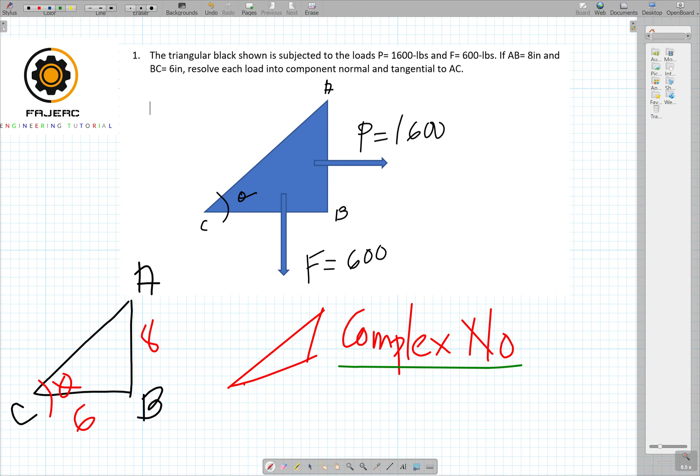Okay? Complex. Now, pinag-usapan na naman natin yung complex. Ano kaya ibig sabihin ng complex number? Ano ibig sabihin ng complex number? Diba? What do you mean by complex number? Ano ibig sabihin ng complex number? Taas ko muna. Actually, class, ang complex number is a combination of real number and imaginary number.

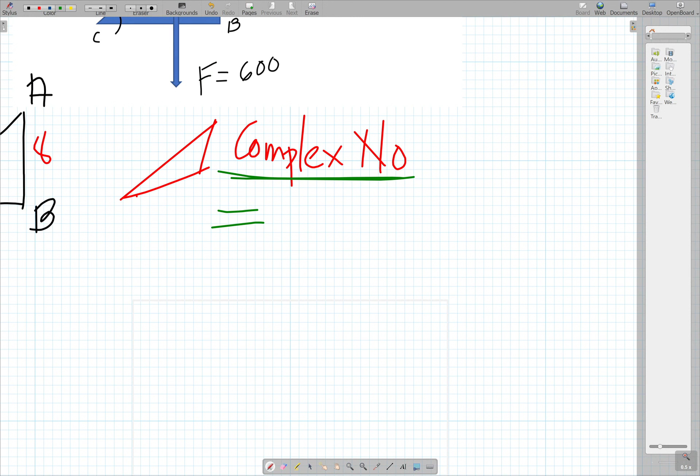Yun ang ibig sabihin ng complex number, no? Complex number is a combination of real number plus, ayan, and imaginary number. Okay, yun ang ibig sabihin ng complex number. Now again, kung magtanong ako, ano ibig sabihin ng real number? Ito.

Ano ibig sabihin ng real number? Lahat ng number na sa isipan mo, yan ang real number. Yung number wala sa isipan mo, yun, of course, imaginary number. Meron ba yun? Meron, di ba?

For example, square root of negative 4. Ano kaya ang answer mo? Di ba undefined? We try sa calculator, para klaro. Square root of negative 4 equals. Ayan, ito yung naka-complex.

Ulitan natin muna. Square root of negative 4 equals. So, math error siya, undefined. So, yung number na yun, square root of negative 4, is an imaginary number. Again, complex number is a combination of real number and imaginary number.

Okay, so pag ipa-plot natin yung 8 at saka 6 sa Cartesian, we try to plot. Wait, move natin. Plot natin ang 8 at saka 6. Yung 6 is horizontal, ang 8.

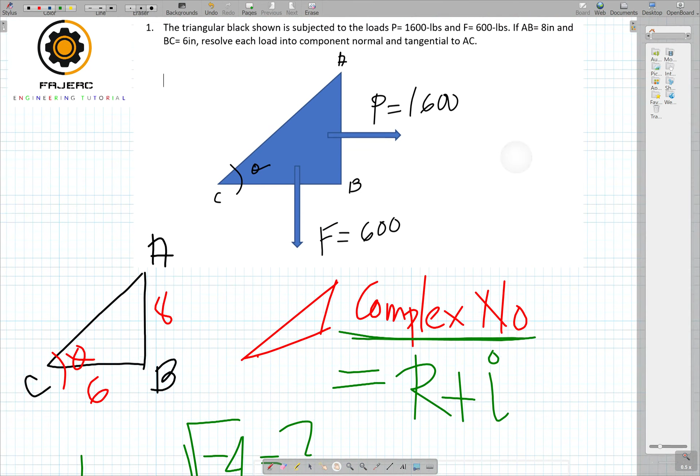6 plus J8. Okay, so go back to question. Sana, okay, ito, so naintindihan na natin, no, yung if AB equals 8, and then BC equals 6. Okay, so using complex, pwede natin makuha yung AC, which is equals to 10.

Okay, so ano ba yung tanong niya? Resolve each load, yung dalawang load na to. Ito, resolve each load. So ano naman yung load na? Load P at saka load F, into component, normal and tangential to AC. Pag ibig sabihin natin, class, resolve each load.

Let's say, considering load P, kasi each load siya. Considering load P, resolve each load, resolve load P into component normal and tangential to AC. Actually class, ang component naman, that is actually vertical and horizontal, projection ng force. Okay, so dito, sabi dito, resolve each load into component, resolve the load P into component normal and tangential to AC. Ano ibig sabihin ng normal to AC? Ito yung AC natin, di ba?

Yan ang AC mo. Ang normal to AC is this one. And follow. Papunta dito. Papunta dyan, di ba? That is normal to AC. Actually, ang ibig sabihin ng normal, another term for normal, that is perpendicular. Okay? The next one is the component of load P.